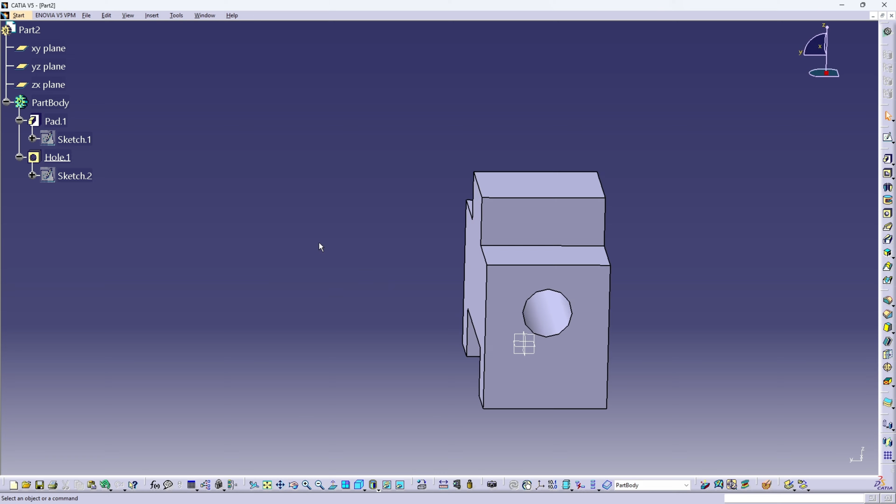Let's create one more tutorial in CATIA V5. In this video, you'll learn to use pad and hole. So open CATIA V5 and let's go.

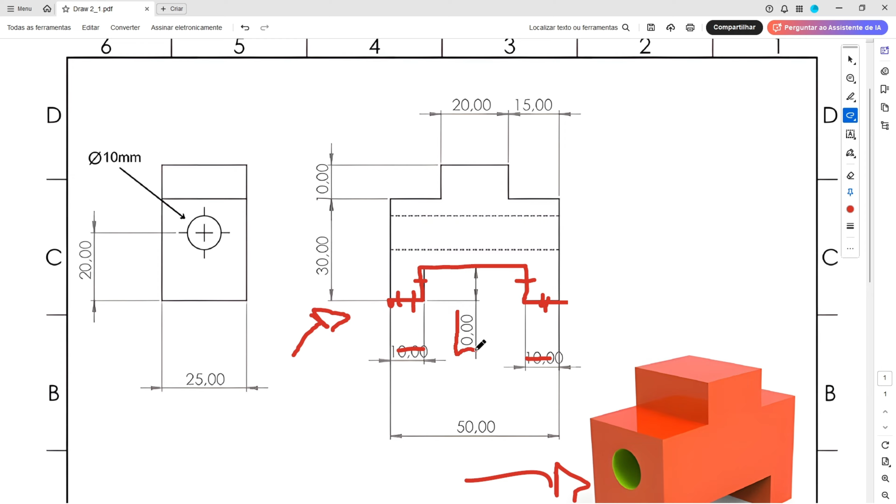The first step to create this part, we will select the right plane and make this sketch. Here will be the midpoint. The first thing we make is these lines. This line here and this one have 10 millimeters of length. This line here has 10 millimeters. And the distance between this point and the midpoint is 50 millimeters.

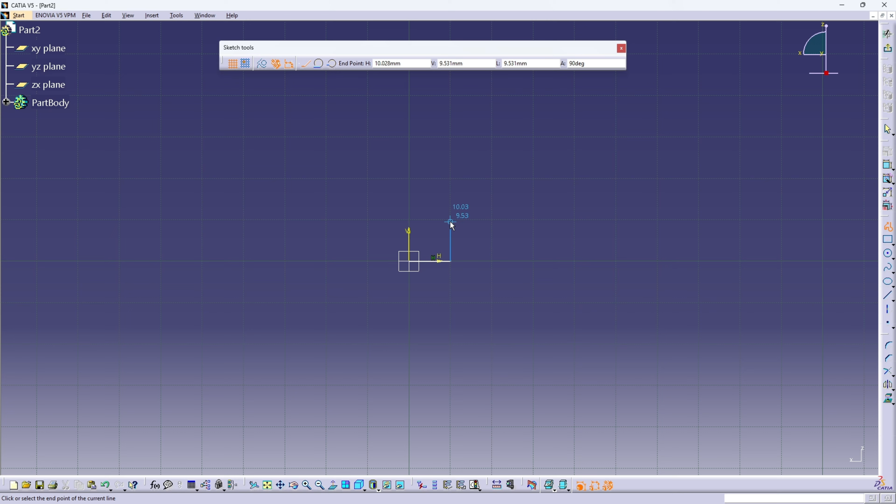So go to sketch and select the right plane. Here select profile. Click here in the midpoint. Make this sketch here. Okay, and activate the constraints.

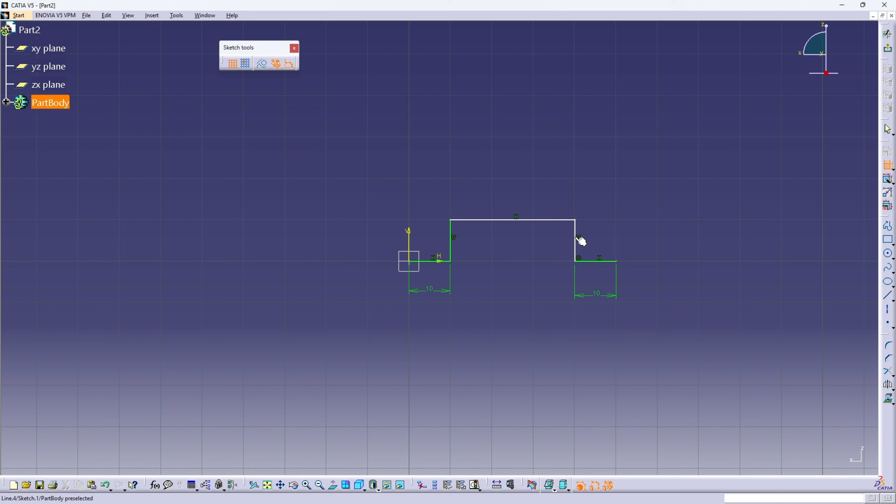Double click here, select this line, 10 millimeters. This line here has 10 millimeters. This line here has 10 millimeters. And the distance between this point and the midpoint is 50 millimeters.

And now we will create this sketch. Let's create this, we'll put the dimensions later. So select the profile again. Click here.

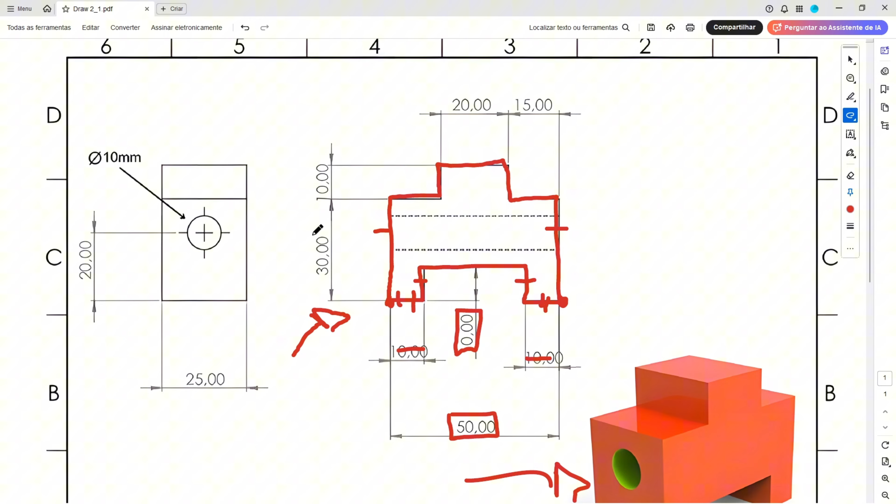Okay, and go to constraints to put the dimensions. This line here has 30 millimeters, this one has 10 millimeters. So select this line here, 30 millimeters here, and 10 millimeters here.

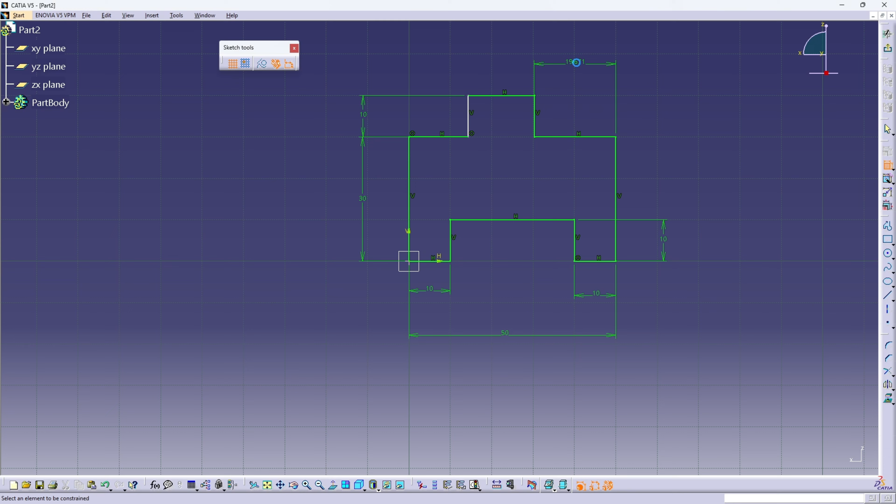And this line here, 15, and this one, 20. So here we have 15, and this one we have 20. We made this profile, okay?

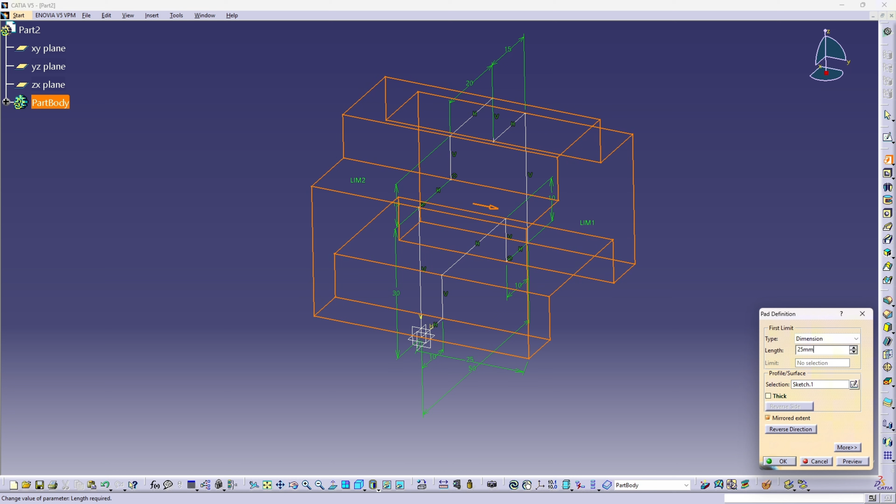Now leave the sketch and go to pad, and we need to extrude this 25 millimeters, the distance here. So the length here, 25 millimeters, and select mirrored extent. So here will be 25/2. Okay, we made this one.

And now we need to create this hole. This hole is throughout this body, and this hole has 10 millimeters of diameter, and the distance between the center of this hole and this edge is 20 millimeters, and it is in the center of this body, between these two faces.

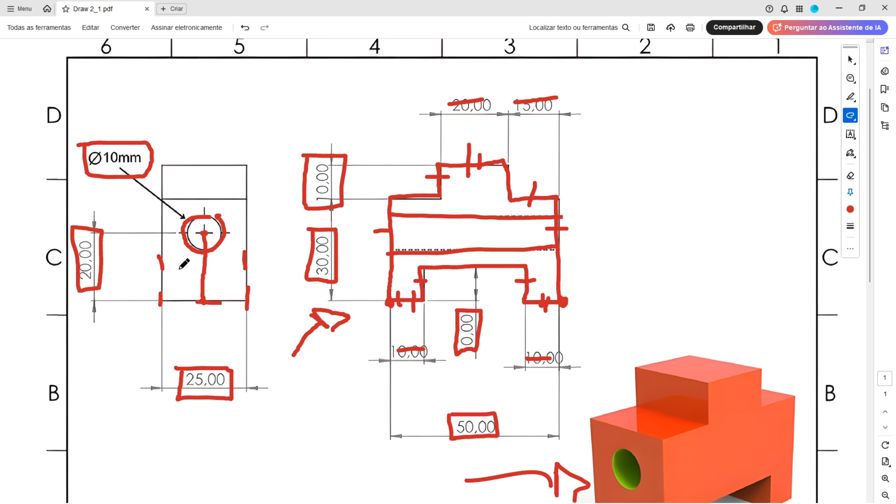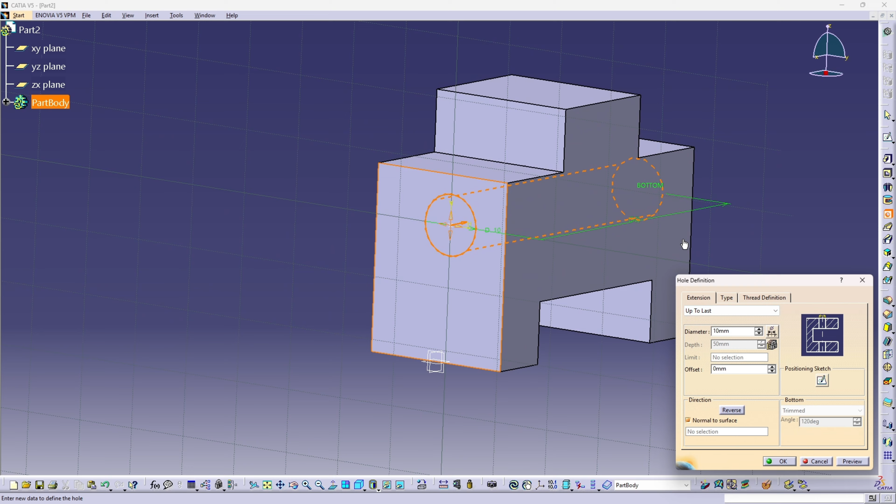So here select the hole, select this face, and the diameter here, 10 millimeters, and the extension here you can change to last. Let me show the preview here.

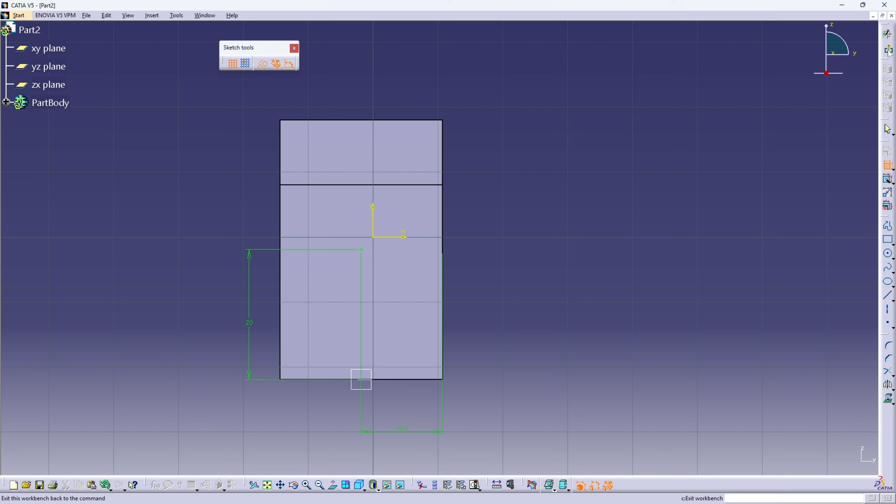And now we need to position this sketch. So click here and go to dimension. The distance between this point and this edge here is 25/2. And the distance between this point and this edge here is 20 millimeters. Okay, leave the sketch and press OK. We made this one.

So here we finish our exercise.